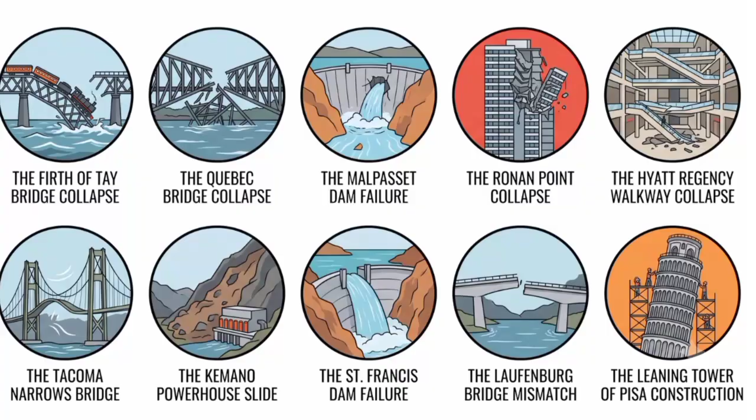This railway bridge in Scotland collapsed on a stormy night in December 1879 while a passenger train was crossing it, killing all 75 people on board.

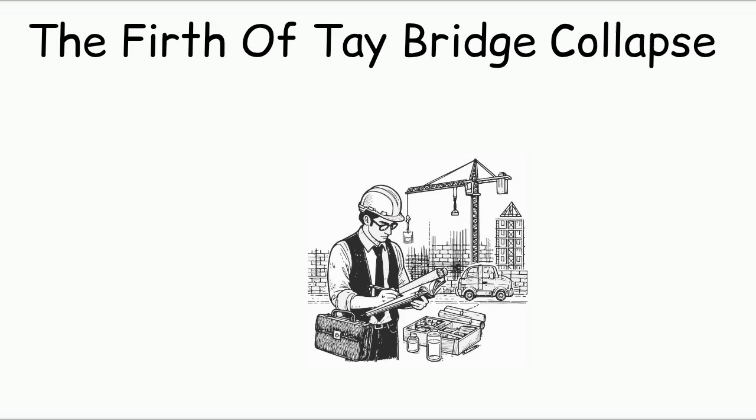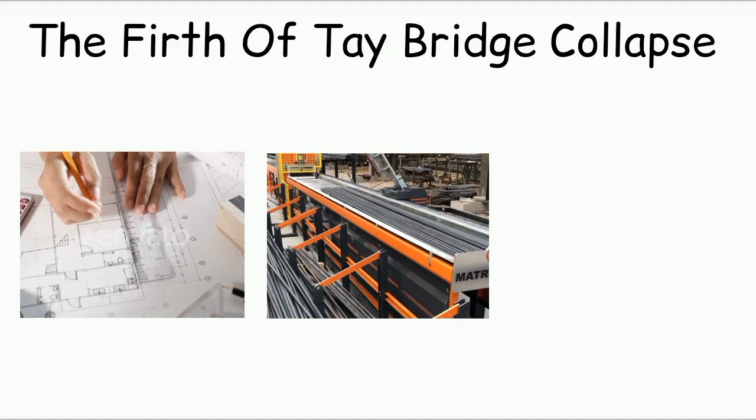The bridge had been considered one of the great engineering achievements of the Victorian era when it opened just 18 months earlier. It was the longest bridge in the world at the time and had been personally inspected and praised by Queen Victoria. The collapse was caused by a combination of design flaws, poor quality cast iron in the structural columns, and inadequate accounting for wind loads.

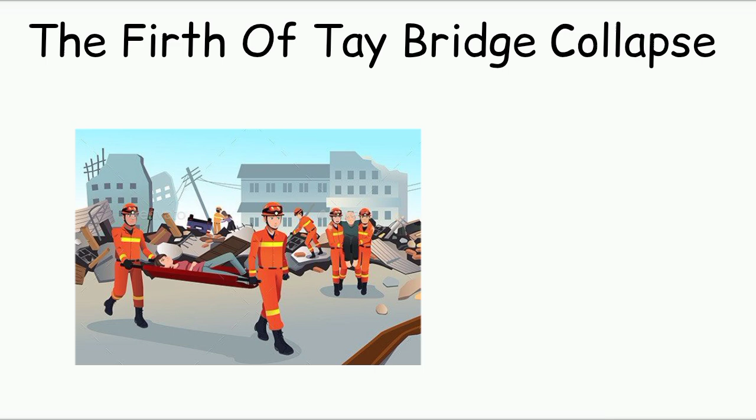The chief engineer Thomas Bouch was found responsible and died in disgrace less than a year later. The disaster completely changed how engineers approached wind loading calculations for bridges and led to the introduction of formal standards for bridge testing in Britain.

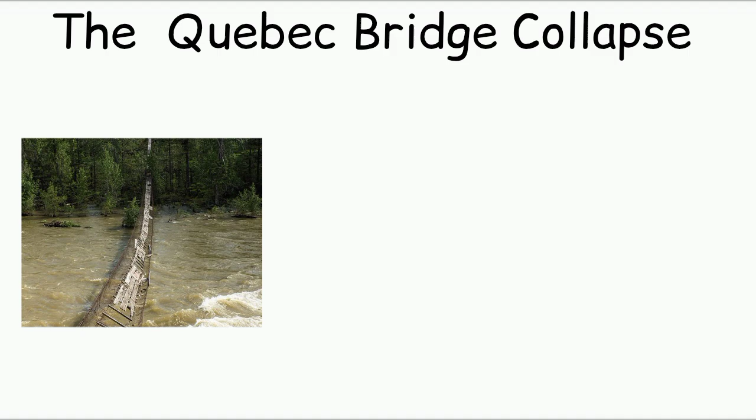The Quebec Bridge collapse. This bridge over the St. Lawrence River in Canada collapsed twice during construction, making it one of the most catastrophic engineering failures in North American history. The first collapse in 1907 killed 75 workers when an arm of the cantilever fell into the river due to miscalculations in the weight of the steel structure.

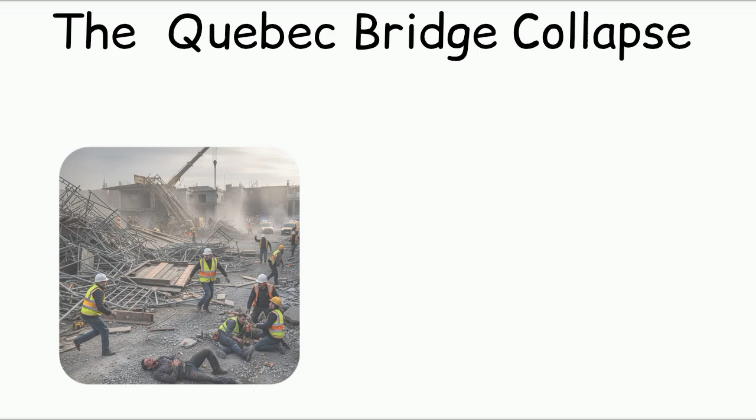Rather than redesigning the bridge from scratch, engineers returned to the same basic design with modifications, and during the second construction attempt in 1916, a central span section fell while being raised into position, killing another 13 workers. The bridge was eventually completed in 1917, but the two disasters reshaped engineering education in Canada in a lasting way.

Canadian engineers to this day wear an iron ring on their working hand as a reminder of the human cost of engineering failure, a tradition started partly in response to this disaster.

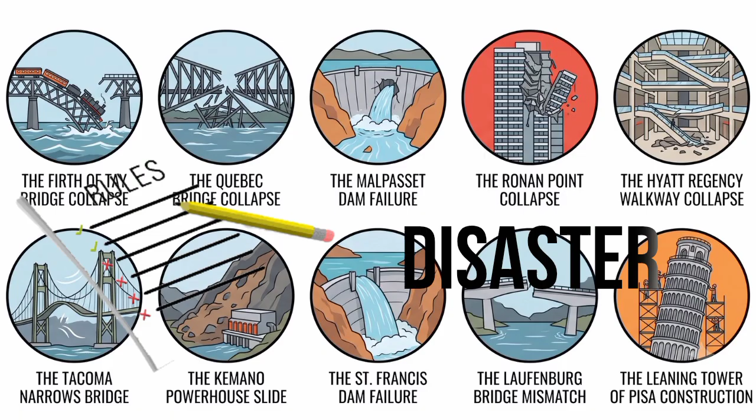The Malpasset Dam failure. This arch dam in southern France collapsed on the night of December 2, 1959, releasing 50 million cubic meters of water into the valley below. Within minutes, the flood wave destroyed everything in its path, killing 423 people in the town of Fréjus and surrounding villages.

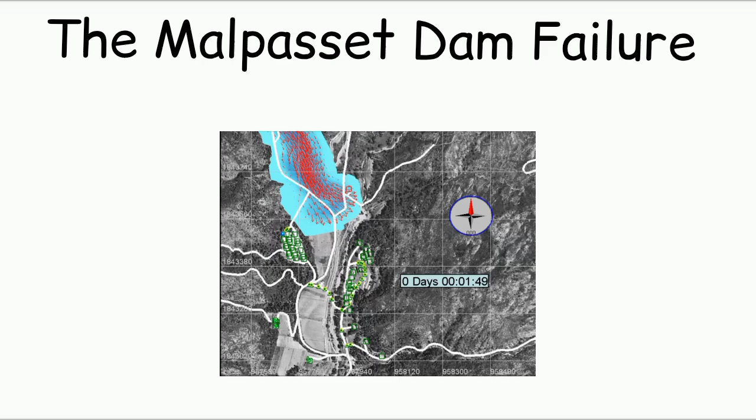The dam had been considered a technical triumph when it opened in 1954 as the thinnest arch dam ever built. The failure was caused by water seeping into a fault in the rock foundation that had not been detected during geological surveys, which caused the left abutment to shift and the arch to fail.

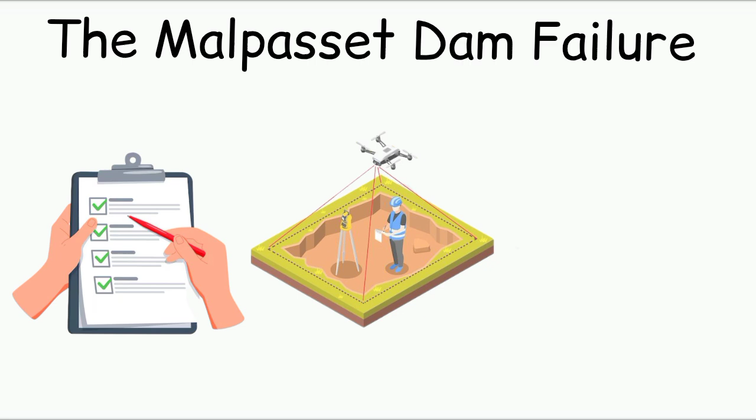The disaster led to a complete overhaul of dam safety practices in France and internationally, including requirements for detailed geological surveys of foundations before construction begins.

The Ronan Point collapse. This apartment tower in London suffered a partial progressive collapse in May 1968 when a gas explosion on the 18th floor blew out a load-bearing wall panel.

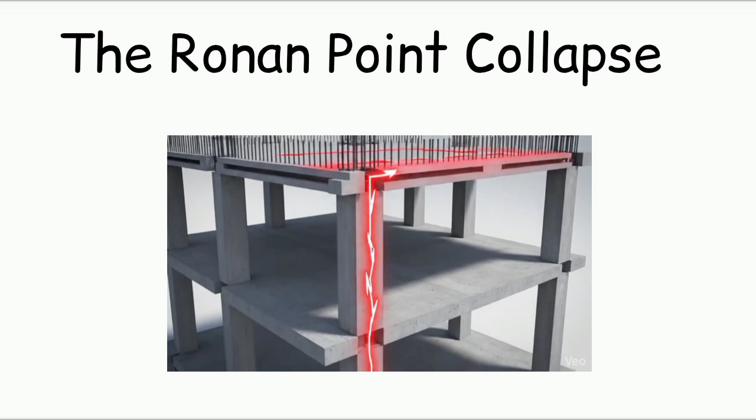Because the building used a construction system where each floor slab rested on the one below rather than being tied into a structural frame, removing one panel caused the floors above to fall, which in turn caused the floors below to collapse under the impact.

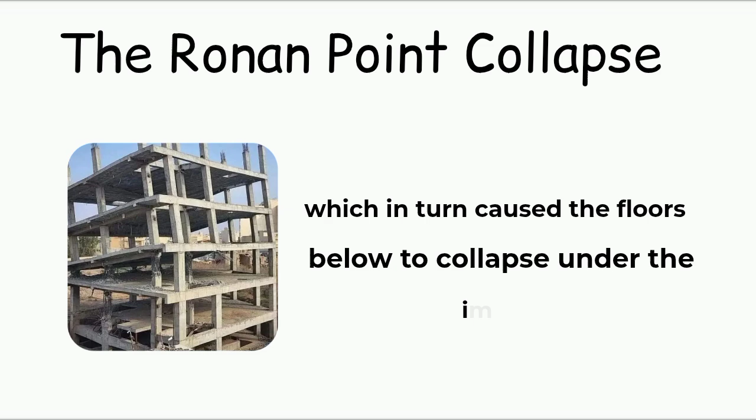4 people were killed and 17 injured. The building had been completed just 2 months earlier and was considered a modern, efficient housing solution.

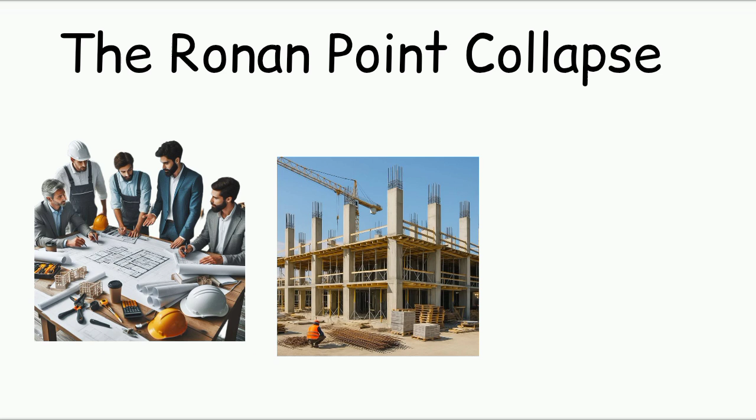The collapse revealed fundamental weaknesses in the large panel system construction method that was being used widely across Britain and other countries at the time. Building regulations were changed, but many buildings constructed using the same method remain standing today.

The Hyatt Regency Walkway collapse. This disaster in Kansas City, Missouri in July 1981 remains the deadliest structural collapse in American history outside of the September 2001 attacks. 2 suspended walkways in the atrium of the Hyatt Regency Hotel fell during a crowded dance event, killing 114 people and injuring more than 200 others.

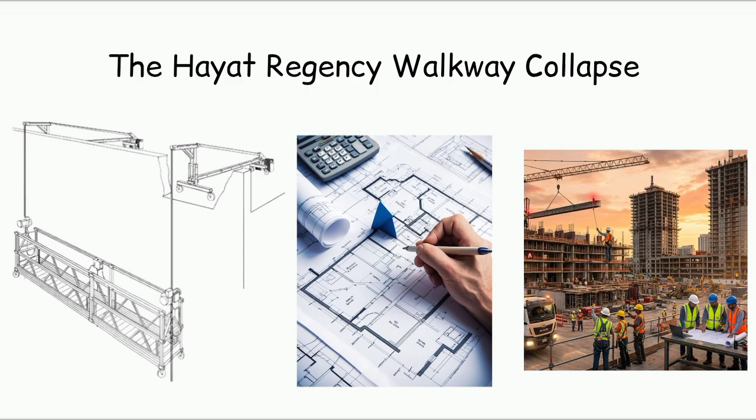The walkways were hung from the ceiling using vertical rods, and a design change made during construction had doubled the load on a critical connection point by altering how the rods connected to the walkway beams. The change had been communicated between the engineering firm and the fabricator in ways that were unclear and inadequately reviewed.

Investigations afterward found that even the original design was insufficient to meet the building code. The engineers responsible lost their professional licenses.

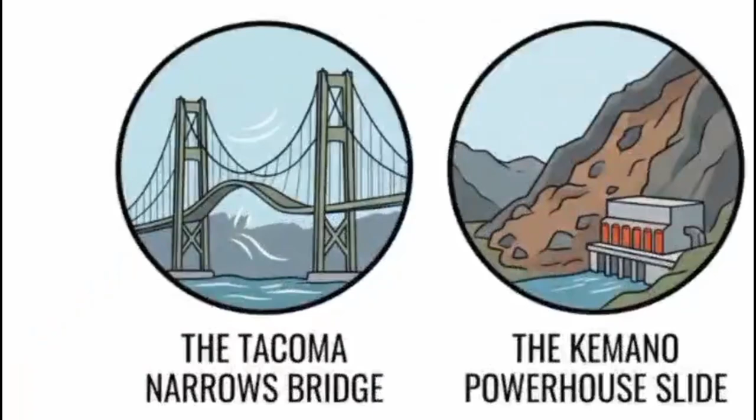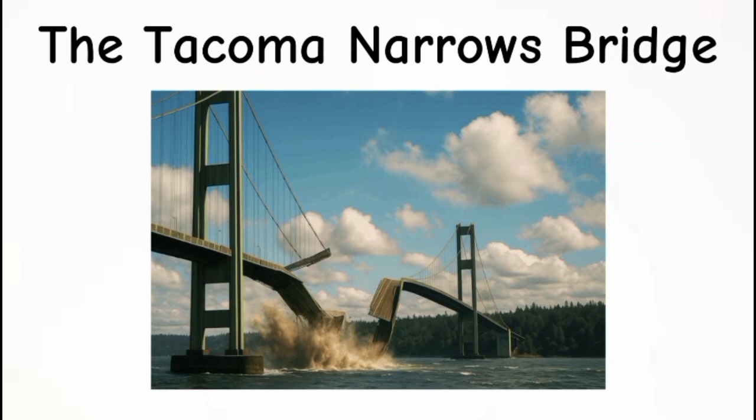The Tacoma Narrows Bridge. This suspension bridge in Washington state opened in July 1940 and collapsed just four months later, in November of the same year, after developing violent oscillations in a moderate wind. The collapse was captured on film and became one of the most studied events in the history of structural engineering. The bridge had earned the nickname Galloping Gertie shortly after opening because of its tendency to sway and ripple even in light winds.

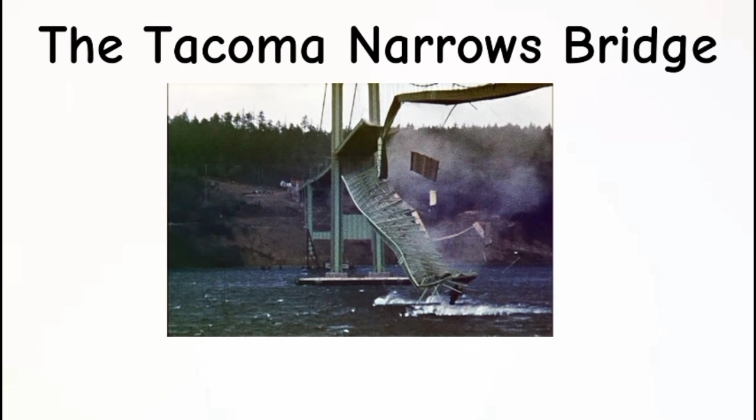Engineers had been aware of the motion but considered it an aesthetic quirk rather than a safety concern. The collapse was caused by a phenomenon called aeroelastic flutter, where the deck design inadvertently created conditions for the wind to reinforce its own oscillations rather than dampen them. Bridge design was permanently changed as a result, with aerodynamic testing becoming a standard part of the engineering process.

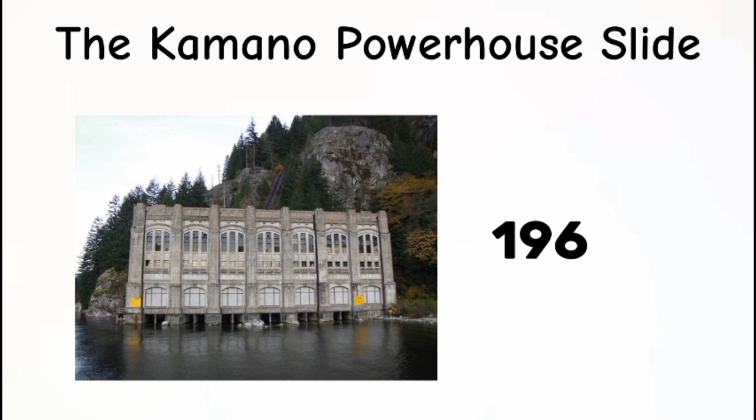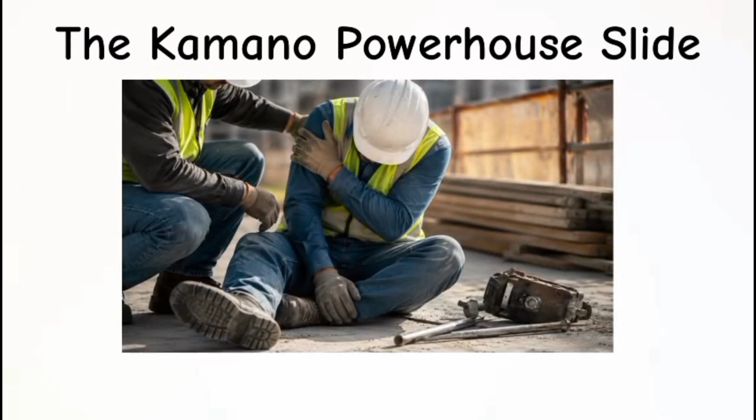The Kemano Powerhouse Slide. This hydroelectric facility in British Columbia was nearly destroyed in 1961 when a massive rock slide above the intake tunnel threatened to collapse the entire water delivery system for one of the largest aluminum smelters in the world. The slide had been triggered by blasting during construction of the project and sent millions of tons of material down the mountainside. Workers evacuated in time and nobody was killed, but the damage to infrastructure was severe.

The recovery required engineering solutions that had no precedent, including drilling relief tunnels through active slide material while the mountain continued to move above them. The story received almost no public attention at the time and is largely unknown outside of the hydroelectric engineering community, but it is studied as a significant case in geotechnical risk management.

The St. Francis Dam failure. This concrete arch gravity dam north of Los Angeles failed on March 12, 1928, releasing 12 billion gallons of water into the Santa Clara River Valley. Between 400 and 600 people were killed, making it one of the deadliest civil engineering disasters in American history.

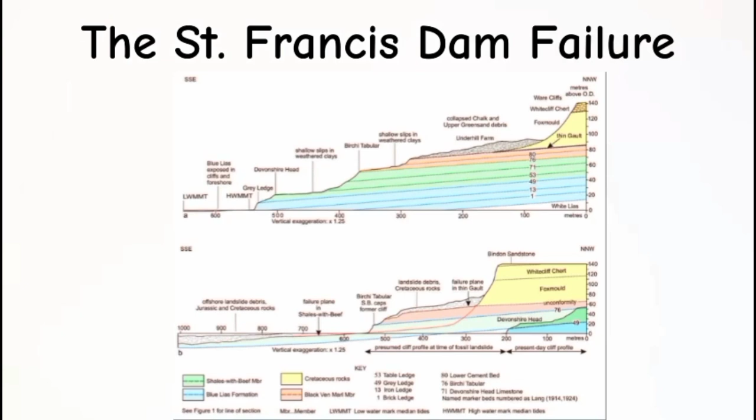The dam had been designed and built under the supervision of William Mulholland, one of the most celebrated water engineers in the American West and the man responsible for bringing water to Los Angeles. Investigations showed that the geology of the canyon walls was far more unstable than surveys had suggested, with one side resting on ancient landslide material that softened and failed when saturated. Mulholland accepted personal responsibility at the inquest, and his career and reputation never recovered. The disaster ended the era of major dam construction by a single self-taught engineer without formal peer review.

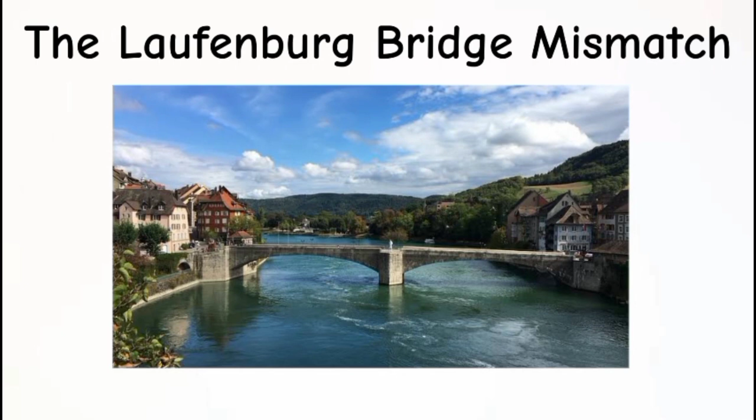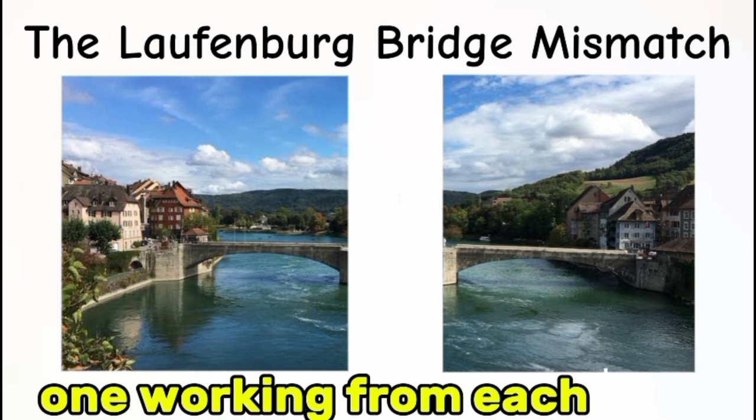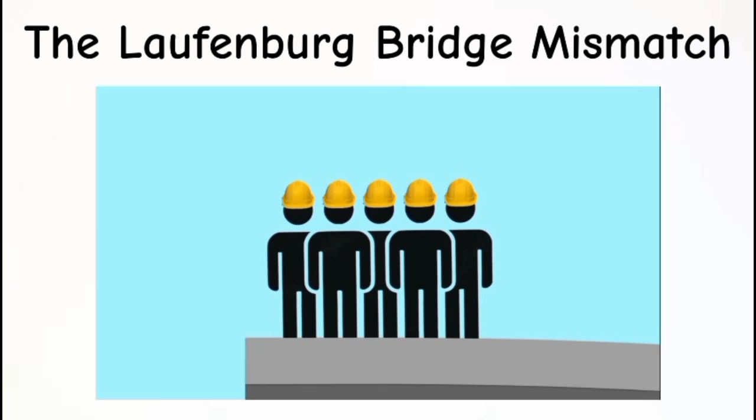The Laufenburg Bridge mismatch. This bridge across the Rhine River connecting Germany and Switzerland was completed in 2003 and immediately discovered to have a 54-centimeter height difference between the two halves. The two construction teams, one working from each bank, had used different sea level reference points. Germany calculates elevations relative to the North Sea, and Switzerland calculates them relative to the Mediterranean, and the teams had failed to account for the 27-centimeter difference between those reference levels.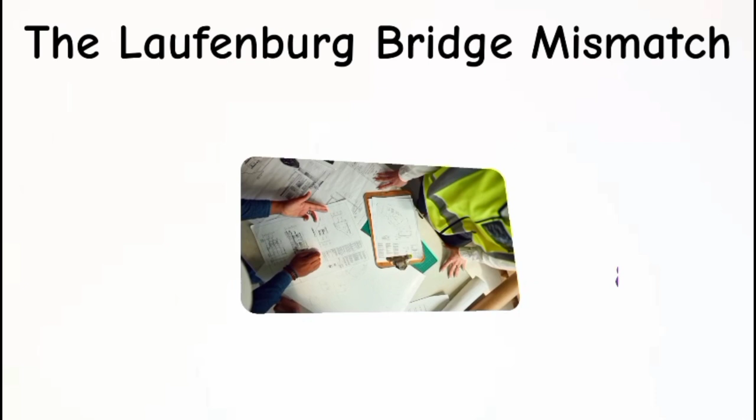When the adjustment was multiplied by the specific topography of the crossing, the result was a visible and embarrassing step in the completed roadway. Correcting the problem required expensive modifications to the approach sections on both sides. The project became a case study in the importance of verifying shared reference data before large transboundary construction projects begin.

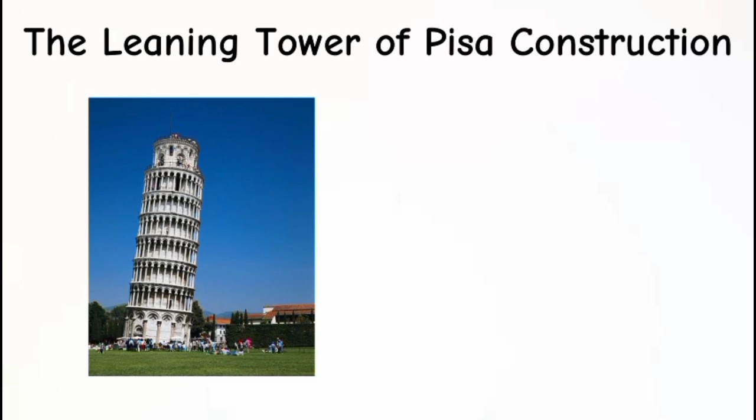The Leaning Tower of Pisa construction. This bell tower in Italy has been leaning almost since its construction began in 1173, and the story of how it ended up that way is one of the longest engineering dramas in history. The lean began almost immediately because one side of the foundation was built on soil that was too soft to support the weight of the structure.

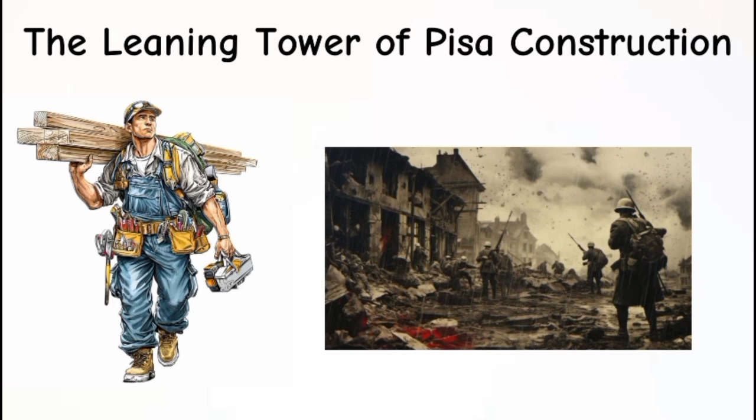Construction was halted multiple times over the following two centuries due to wars and political disruptions, which ironically gave the soil time to compress and stabilize enough to prevent total collapse. By the time it was completed in the 14th century, the lean was already pronounced.

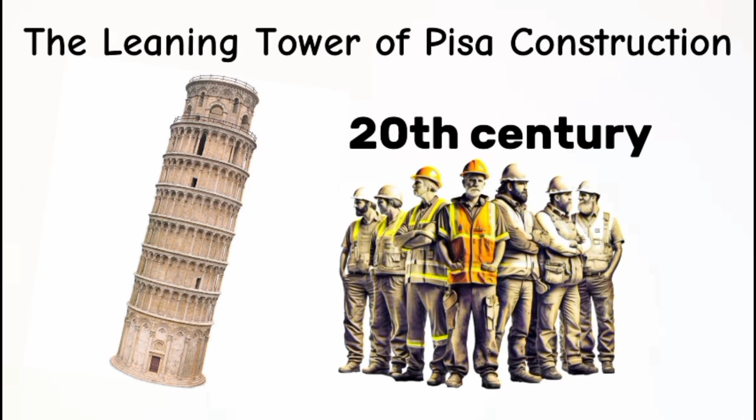Over the following centuries, it continued to tilt further, and by the late 20th century, engineers determined it was in danger of falling. A major stabilization project completed in 2001 removed soil from the high side to allow the tower to settle back slightly, reducing the lean to a safe angle.